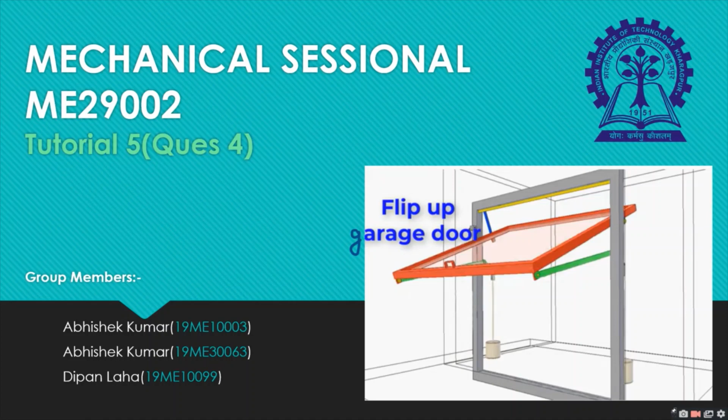This video is for assignment 5 given in the subject of mechanical sessional. Me and my group members Abhishek and Dipan have solved question number 4, which is the synthesis and simulation of a flip-up garage door mechanism without using any prismatic or higher pair joints. This is the side view of the mechanism given in the YouTube video for our reference. It may be a little different from our final synthesis.

And it's the kinematic diagram of mechanism, which is a 4R mechanism. The door frame acts as the fixed link, whereas the door is lifted up with the help of two links.

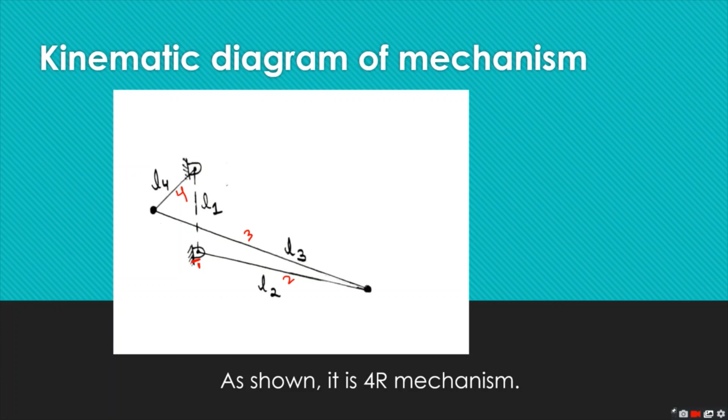Calculating degree of freedom, we have number of links equal to 4, that is ground and the links, and number of joints equal to also 4. So sigma fi equal to 4, one for each revolute joint. So using the number of links, number of joints and sigma fi, we will get degree of freedom equal to 1.

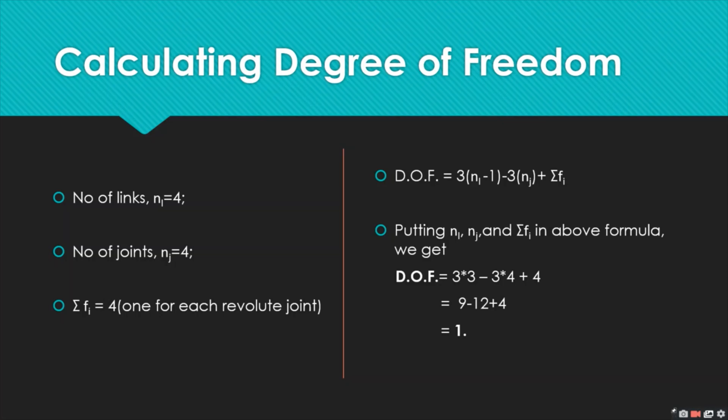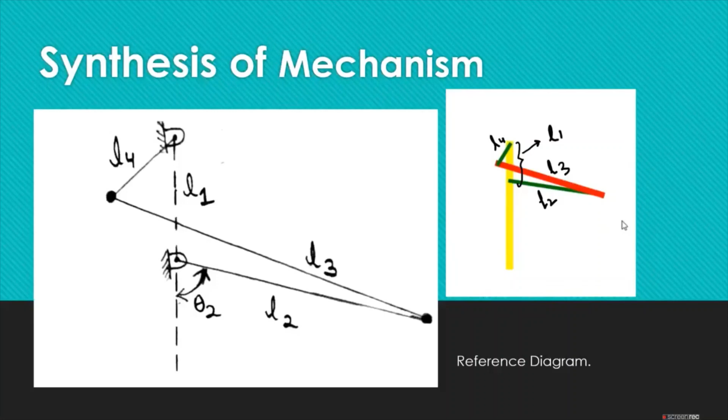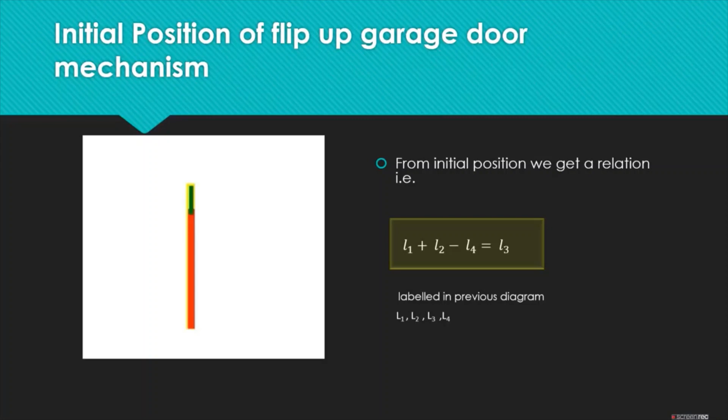Myself Abhishek proceeding to show the synthesis of our mechanism, and here is a reference diagram of our mechanism. Figures show the initial position of flip-up garage door mechanism, and from this initial position we get a relation L1 plus L2 minus L4 is equals to L3, and L1, L2, L3 and L4 is labeled in previous diagram.

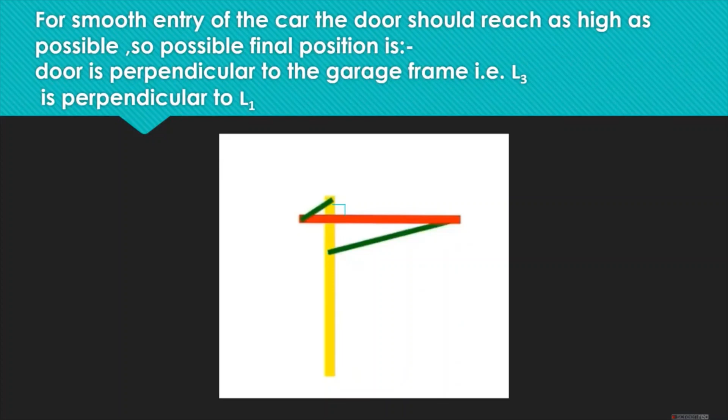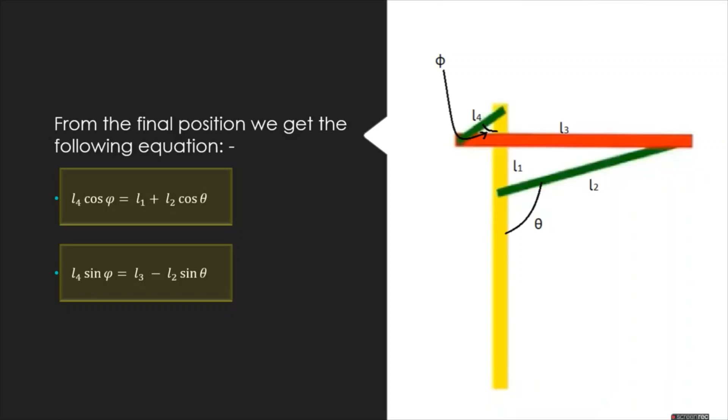And for the smooth entry of the car, the door should reach as high as possible. So possible final position is door is perpendicular to the garage frame, that is L3 is perpendicular to L1. From the final position we get the equation, that is L4 cos phi is equals to L1 plus L2 cos theta, and L4 sin phi is equals to L3 minus L2 sin theta, where theta and phi are shown in the figure. Now we have three equations, one from initial position and two from final position. We have named that as 1, 2 and 3.

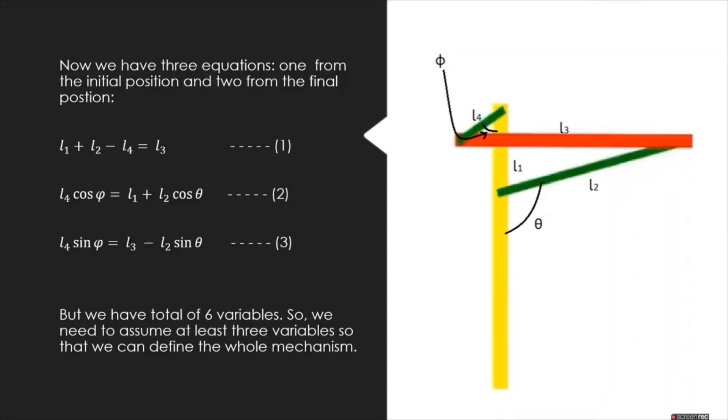We have total 6 variables, so we need to assume at least 3 variables so that we can define the whole mechanism. Assume that L1 is 6 unit, L2 is 14 unit, and after several trial we get a decent assumption that theta is 109 degree, for which the area occupied by the lifted door is quite small. We will eliminate phi by using equation 2 and 3. We will square, and adding both the equation we get L4 square is equals to L1 plus L2 cos theta whole square plus L3 minus L2 sin theta whole square, and we name that as equation number 4.

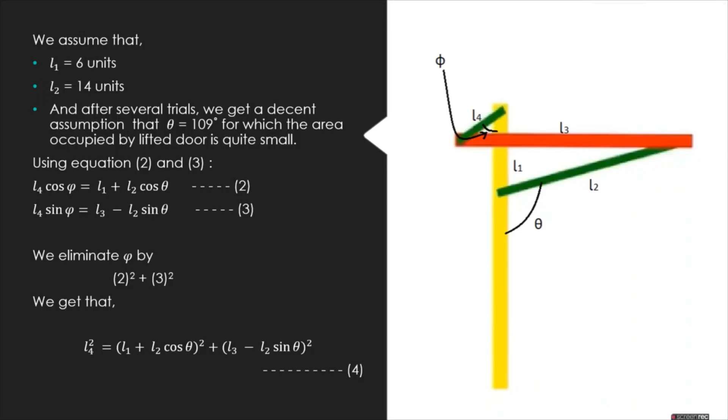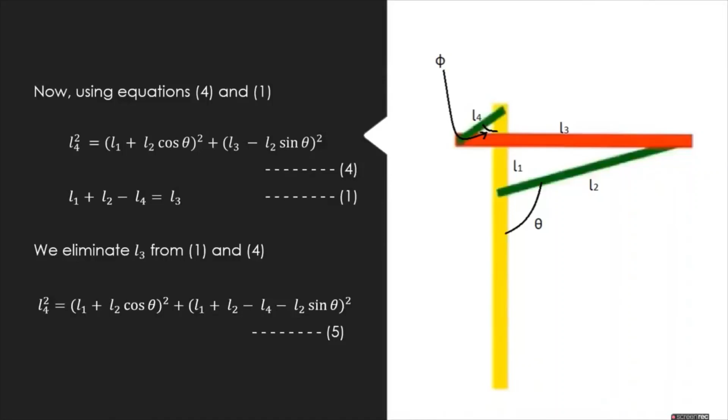Now we eliminate L3 using equation 1 and 4. We get L4 whole square is equals to L1 plus L2 cos theta whole square plus L1 plus L2 minus L4 minus L2 sin theta whole square. We name it as equation number 5. Solving the equation 5 by substituting L1 is equals to 6 unit, L2 is equals to 14 unit and theta is equals to 109 degree, we get L4 is 3.6 unit and L3 as 16.4 units. Thus, it completes the synthesis of our 4R mechanism.

I am Dipan Laha and I will explain the simulation of the model. Now here I have used Python to make simulation. As found while synthesizing, I have used the total garage frame length to be 20 units and the total door length is taken as 16.4 units. The two supporting link lengths have length 14 and 3.6 units each.

I have approached the simulation in a simple way. In the figure, we can see that the locus of A is that of a circle with O1 as its center. At any time, let the position of A be as shown in the figure. Now we know the lengths of AB and BO2 as the link lengths that we have synthesized. So, taking A as the center, an arc of radius AB is drawn, and taking O2 as center, an arc of radius O2B is drawn, and the intersection point of these two arcs will give B. Thus completing the 4R mechanism at any time of the motion, and it is the completion of the simulation.

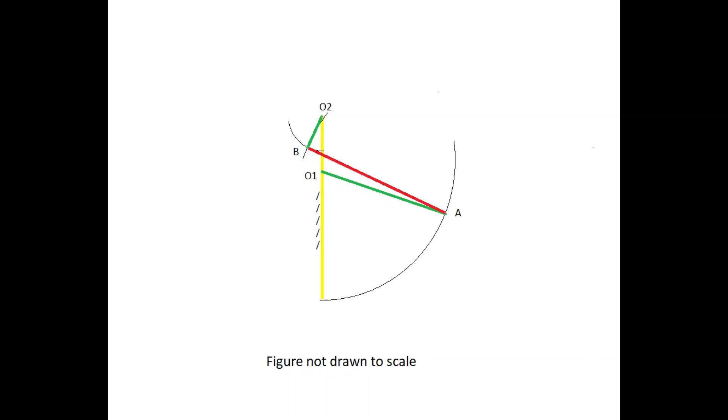Here's a screenshot from the simulation. The yellow part represents the door frame, the red part is the door, and the green ones are the supporting links. Here's the simulation formed using the Python code.

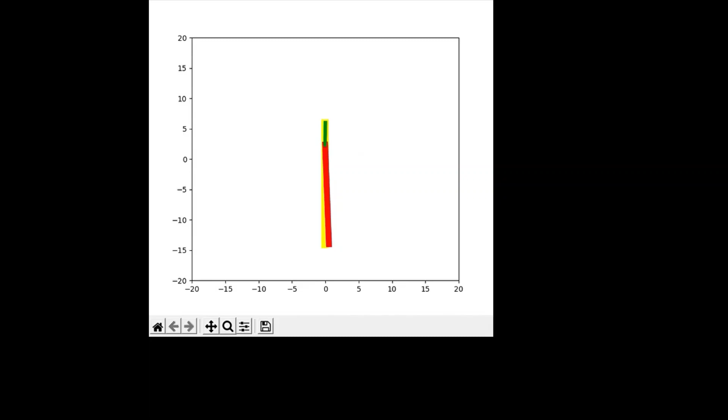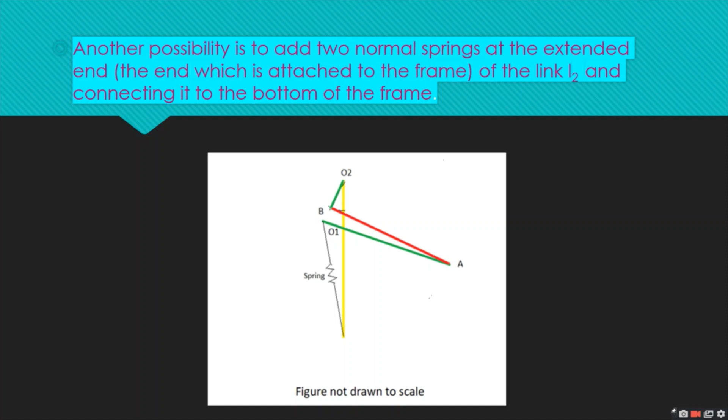Another possibility is to add two normal springs at the extended end of the link L2, the end which is attached to the frame, and connecting it to the bottom of the frame.